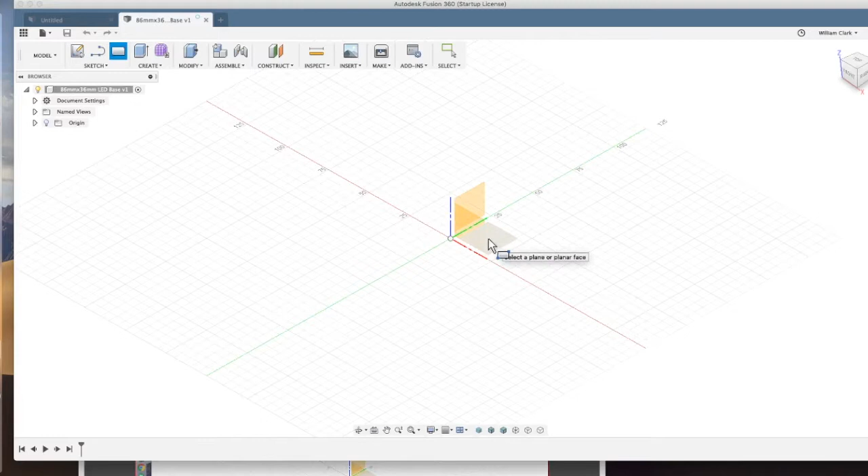Next thing we're going to do is we're going to create a 2-point rectangle. It's going to ask you to choose a face. I choose this one. That is the X, I guess. Now we're working on the X. It tells you to place the first corner. Click here. We're creating a 2-point rectangle. So click in the center, and that's it. Just click and drag. Click. Don't click again. Just drag out.

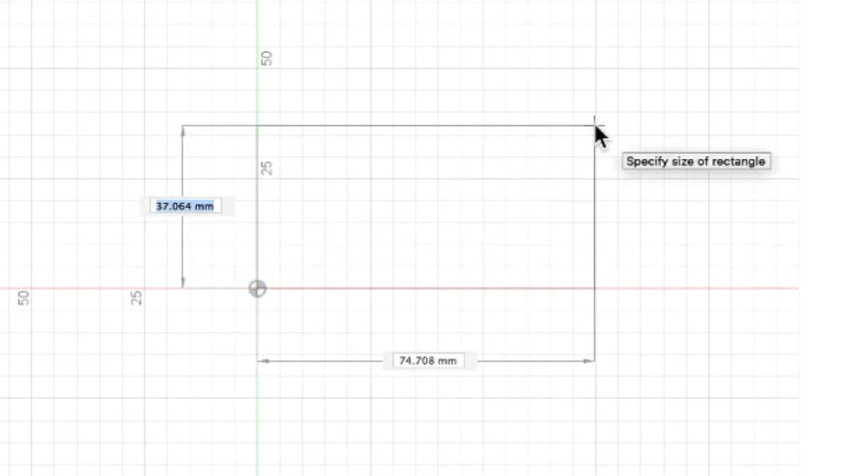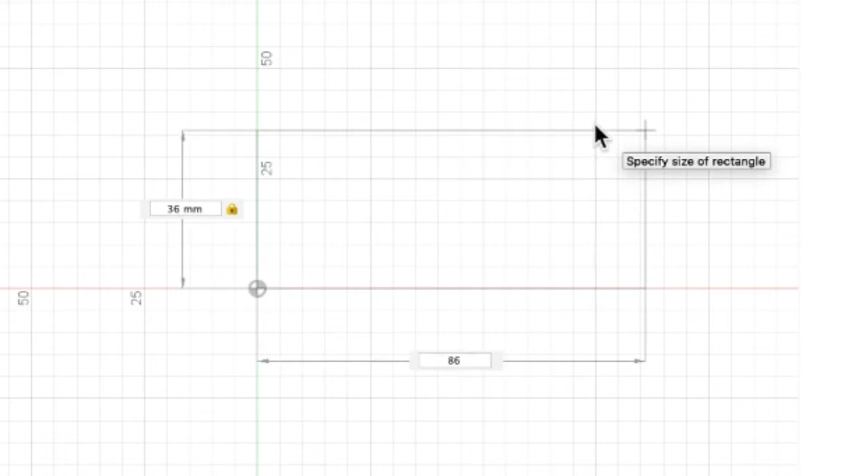And now you can see it's given us some dimensions already. Now you just type in what dimensions you want them to be. I wanted mine to be 36 mil high. There's 36 mil. Now hit tab. I'm going to jump over to the other one. Type in 86 because I wanted mine to be 36 mil by 86 mil. You type in whatever dimensions you want yours to be. Hit enter. Boom, there we are. We're locked in.

Now, you can move these around. This is just simply telling you how big it is. It doesn't change anything. But for housekeeping, you can move this anywhere you want to. Just click and drag it. And once this starts filling up with dimensions, you may find yourself wanting this dimension to be down here or to be closer or to be out or whatever. So you can click and drag these wherever you want them to be. This is just a signpost. This is just showing you what the dimensions of your work are.

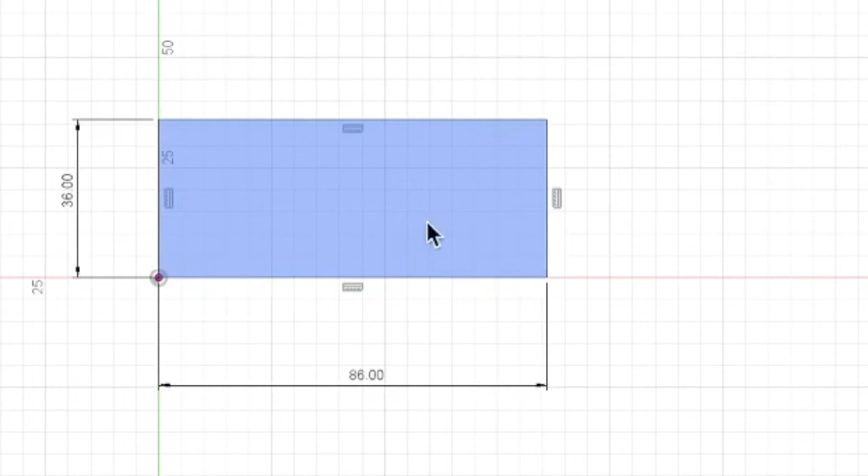Now let's talk about the dimensions of the work. These are things that when I first encountered Fusion 360 and CAD, I just didn't know. And so I'm going to tell you what I didn't know. I thought I had to put in this piece of wood here to be the exact size of the piece of wood I was going to be carving. No, Fusion 360 and this G-code that's going to come from all this doesn't care how big that scrap piece of wood you're putting in your machine is. All it wants to know is how big is the piece that you want after all the cutting is done and the sawdust has settled. So you put in the dimensions of the piece that you want. The final dimensions of this thing you're making, that's the dimensions that go in here.

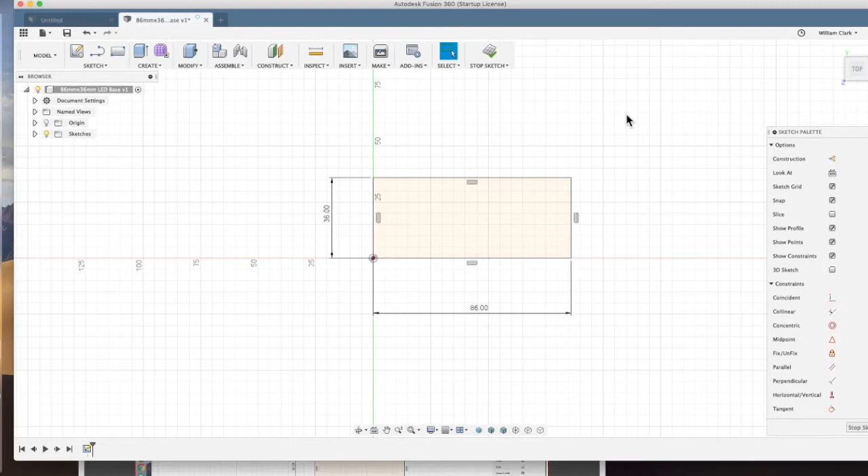We'll deal with how big the stock is, the wood you're cutting out of, or aluminum or plastic or whatever. We'll deal with how big it is later when we do setups. Right now, how big is your part? Put that in here. We're creating the part, the finished product. That's what we're creating. Now, if you remember, what we're making is one of these, an LED base. That's what we're making, but a lot smaller one. So now I've created the base here, except mine is 86 wide by 36 tall. This one's obviously bigger, but I've created that.

Well, now we have to create these other pockets. These carved out pieces, we have to create that on our sketch here to be able to tell the machine how to do it and what to do. Now we're not going to create one exactly like this. I'm going to put in a little trough here, a little slot for the LED strip, like this one. A little slot for the LED strip to sit in, and I'll create a slightly larger slot here on the end because we're going to make this one a little different from what these are. These are for NeoPixels, and I have an Arduino Nano that goes there, or Pro Mini goes there, and some other stuff. This is going to be a more simplified version.

But right now, we're going to put in this LED strip slot and then a slightly bigger slot here on the end, and we have to tell that. We have to tell Fusion 360 where we want that stuff to go. So at this point, we're going to draw some more rectangles.

You can sketch here, choose on sketch. This is called a sketch, by the way, what we're writing right now. See where it says stop sketch? Once we're done with this, we'll click stop sketch. We're in a sketch right now in our model area of Fusion 360, or mode of Fusion 360. We're in model mode, and we're working on a sketch.

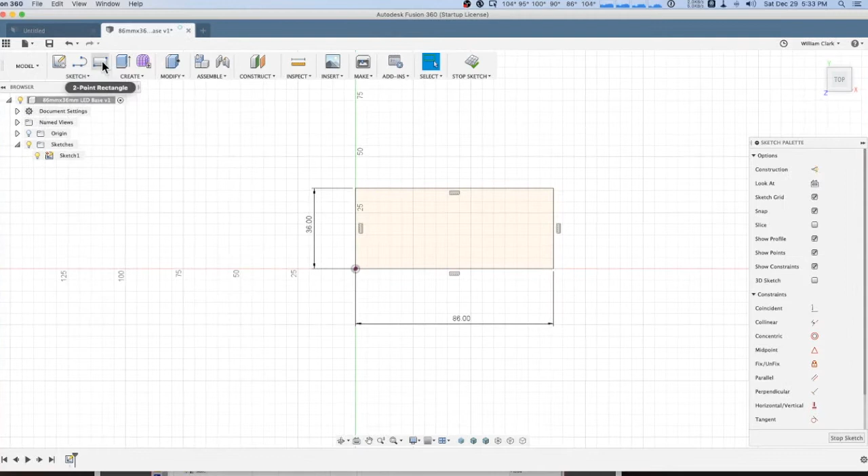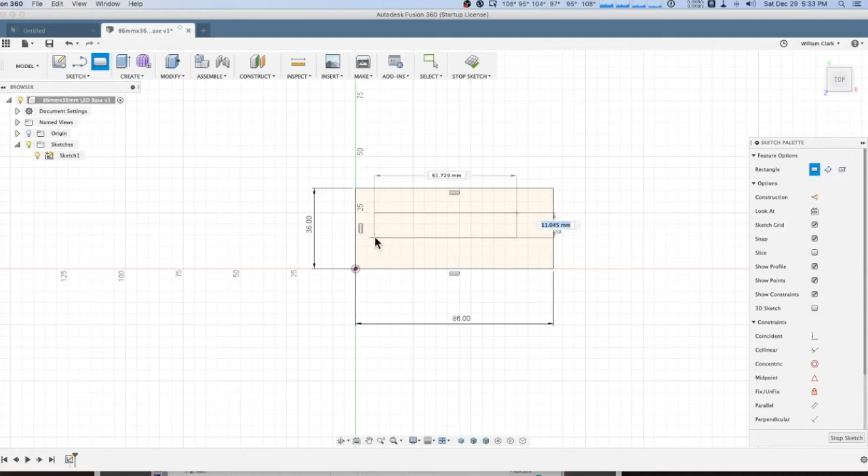The 2-point rectangle, to create this LED slot. And this LED slot, we're going to come from the side. And I'm going to eyeball it here. We are about 1, 2, 3, 4, 5, 6. So this is about center. So for now, we're going to start this slot here. And again, we're just going to click once, drag to whichever direction you want your slot to go in. And that's roughly how big I want it to be.

I think 10.3 is what these finally are. So there we are. I know from doing these other LED bases that 10.3 is how wide I want that slot to be, because that's how wide the LED strip is. And this is a total of 86 mil, and that's 60 mil. That's actually a good size. We're going to leave that 60 there, so we're going to hit enter. Now we've got a new rectangle in there, and we've got our sizes on it.

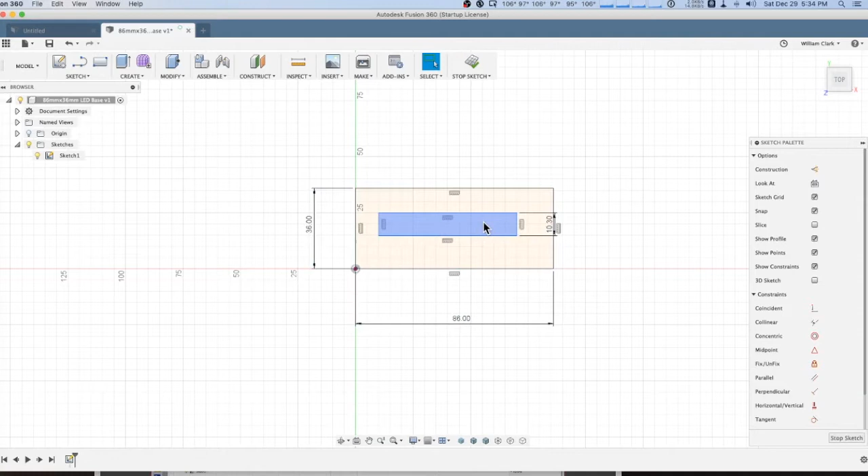It doesn't show the sizes or the dimensions here like it does there. And well, actually, no, it does here on the end. I wonder if that's because I didn't put in a custom size. Because see here, I can now double click this and change it. Change that to 7 mil if I want to.

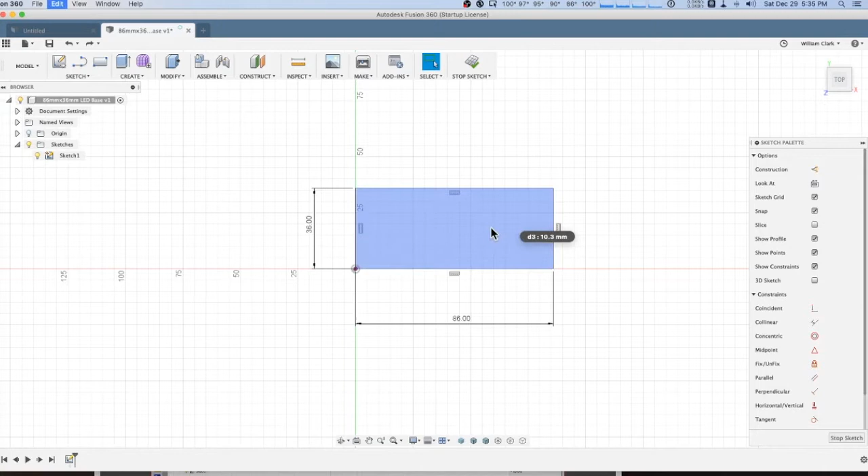Or you can do Command Z. I'm on a Mac. You can do Command Z and step back one, or probably Control Z on a Windows machine. But it didn't give me the dimension that I wish it had. I wish it had given me the dimension here for the 60 mil. I'm not sure why it didn't. I'm going to back up a step, and we're going to do that again just to see if I can get that dimension back, because that's nice to have both of those dimensions.

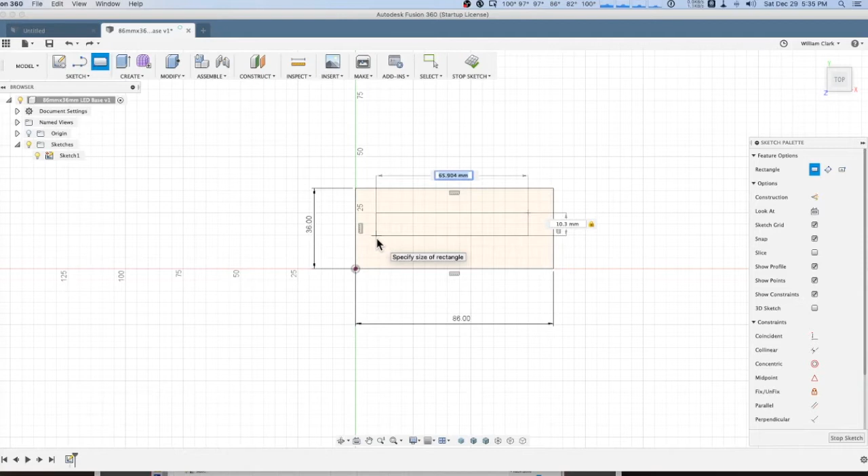I'm going to do a custom dimension. So I did a custom on this side here, and it left the dimension on the sketch for me. We're going to go up here and make this one 60, which is custom because that's not where it started at, and hit enter. And it gave it to me that time. So I guess when you just do the size that you drag, it doesn't give you the dimensions. I wonder why. Say if we just drag this new one, and I accept both of them. I don't do anything custom. It gave me the one dimension, but not the other one. Well, I don't know why it did that, but it did.

So there you go. So again, remember I told you you can drag these around. I'm gonna drag this down here, I like it in the middle so it can show me that this square, that's how big it is. And I'll do the same here. This rectangle, that's how big it is. And so I'm just getting things close here now. There are ways you can go in and center things up. I'm not that good with centering things.

I recommend you do get good with centering, because there's a whole philosophy and best practices that deals with constraints on these sketches. And I really need to get better at those constraints. I'm not very good at the constraints, and I'm sure that's going to bite me in the ass later on down the line. But for today, we're not going to worry about it. Today, this is just, hey, here's how to get a part out of Fusion 360 onto the machine and cut out and in your hands and boom, done. So I am going to center this part, but I'm going to do it the clumsy way. People that know how to center it, you're going to be screaming at your computers right now because of the way I'm doing it.

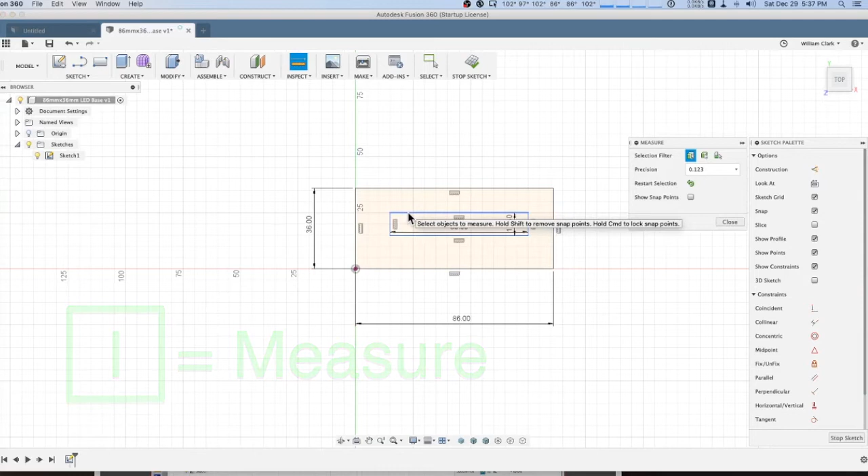I'm simply going to measure. I clicked I for measure and click what you want to measure from and to. And you can see that is 11 millimeters. I'm going to hit escape. Then I'm going to hit I again and click the bottom line of that rectangle and come down to the bottom and click. And it's going to tell me it's 14.7 millimeters.

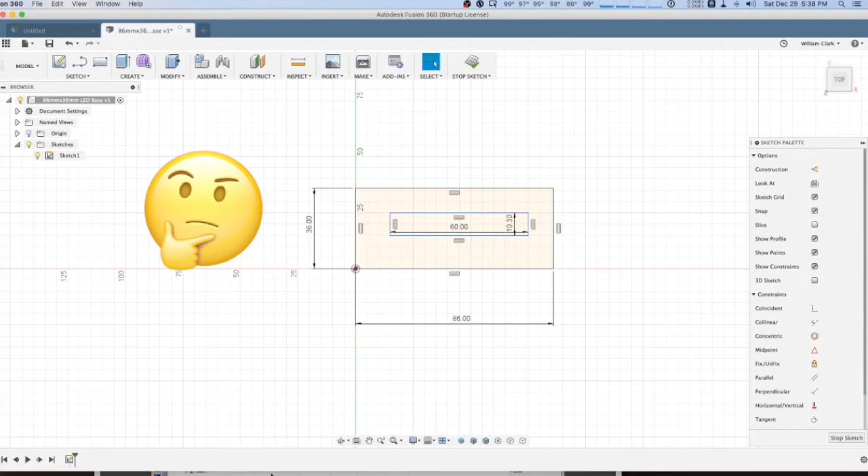So guess what I'm going to do? I'm going to cut that in half, and I'm going to use that as my center. So 14.7 and 11 at the top. So that leaves me 3.7 that I need to trade off to center this thing. So if I cut that in half, that's 1.85. So if I make the top 12.85, 11 plus 1.85 is 12.85.

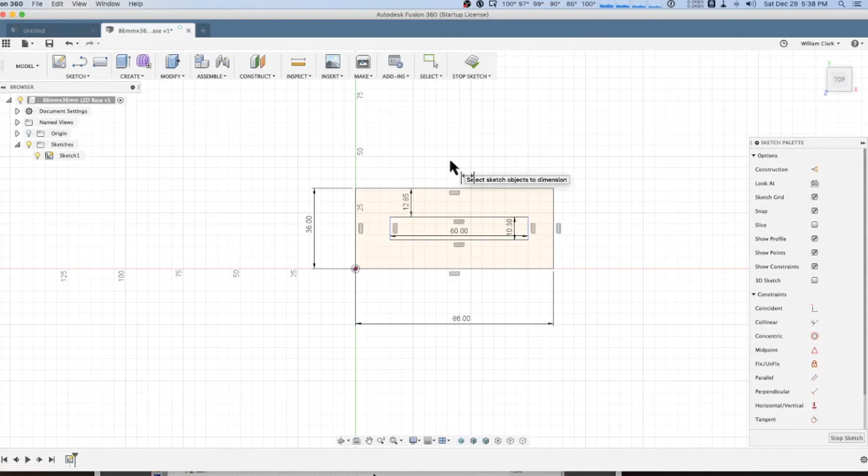I'm going to click D for dimension. Click this top line here and click this. And I'm going to drag this way out here. And it's 11 now, and I'm going to put in 12.85 and hit enter. And this line is now 12.85 millimeters from this line. I'm going to drag that back over here just so it'll be there and it'll show us that. I'm going to click escape to get out of the dimension mode. Otherwise we'll create more dimensions, which we're going to do anyway.

So that's how I centered it up. There are other better ways to center it, but this is the way I do it. This could be one of those cases of do as I say, not as I do. So learn about centering your dimensions, learn about constraints. You'll be better off in the long run for it. It's on my list of things to do. I just haven't done it yet. I'm kind of doing it the old, clumsy way.

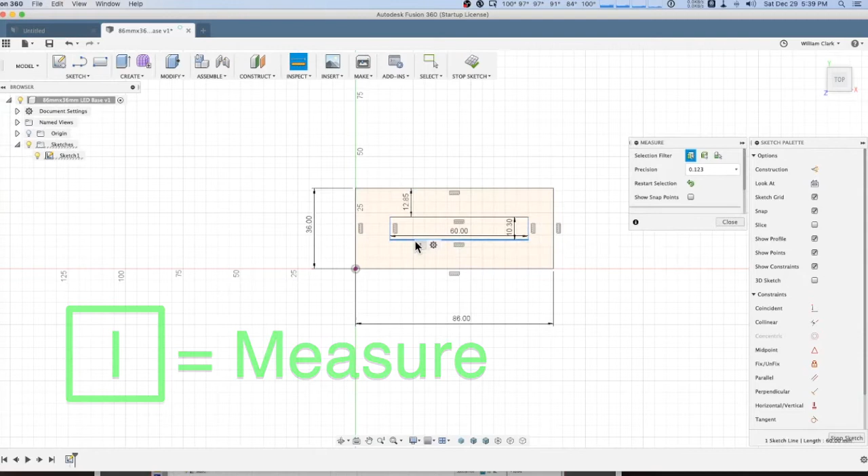So that is now centered. That's 12.85 from that line to that line. And to double check it, click I for measure and click the bottom of this rectangle to this, and it should be 12.85 because math. All right, so I hit escape again. Now we're centered that way. I'm going to go ahead and center it left to right too, because normally I wouldn't if I was actually making this to be a real base. I would offset it, but I'm not making this a real base. This is just a test piece for you guys.

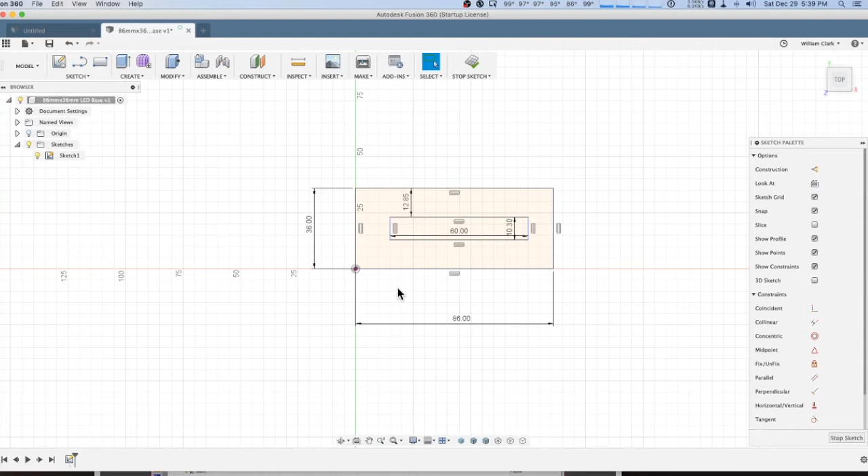So I'm going to zoom in a little bit by using my scroll wheel. We're going to scroll back, which will zoom us in a little bit. And we're going to click hand down here, which gives me the hand. Now we got a little higher resolution here. I'm going to do the same thing I did a minute ago. I'm going to click I for measure. We're going to measure the distance from this side of the rectangle to this edge of the thing. That's 11 mil.

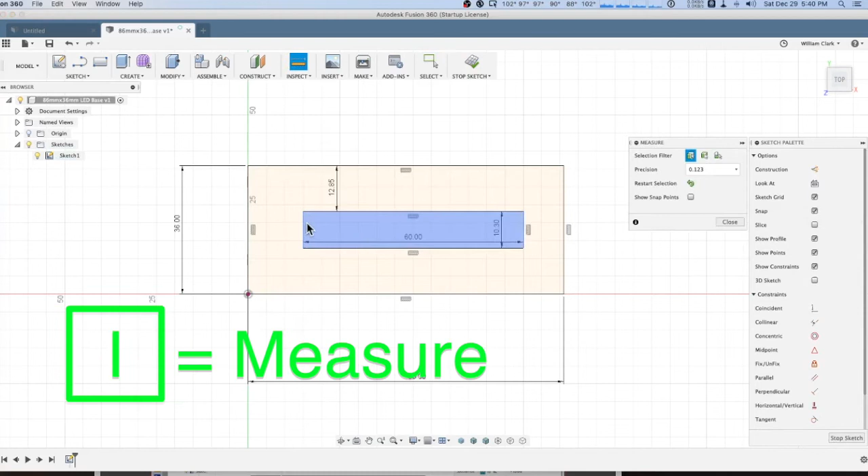I hit escape, then hit I again. We'll go from this side of the rectangle to the far side, and that is 15. So we're a distance of 4. Well, that's easy. We're going to do half of that, which is 2. So we're simply going to add 2 to this side over here. But I'm going to put the dimension on this side because we're going to put some stuff in here. So 11 plus 2 is 13.

So we want this dimension, click D for dimension, to be 13 millimeters. Click here, and then you want the dimension to run to here. Now drag down here and click once. And it's at 15 now, but I want that to be 13 millimeters. Click escape to get out of dimension mode. Now this side is at 13 millimeters. I'm going to pull that up there just so it's right there. And again, to double check yourself, click I, go from this side of the rectangle to the outside, and that is also 13 millimeters. Click escape to get out of measure mode.

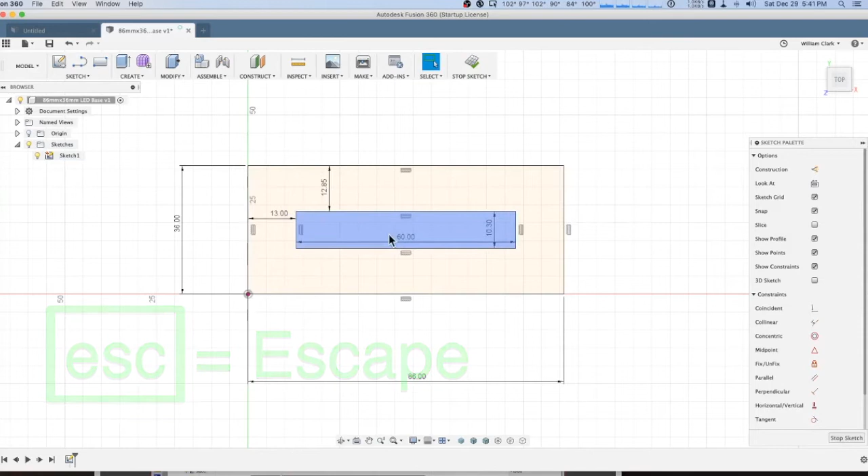And so now we've centered our rectangle here in the middle for where our LED strip is going to be. We're 12.85 mil from the top, 13 mil from the left. And those dimensions are equal on each side, top and bottom. So now we're centered. So now I'm going to put in another little pocket for the controller that controls the LED strips. We're going to create another 2-point rectangle. I'm going to create this one just for the hell of it. I'm going to create it up here.

Right about there. I'm going to drag it over, and it's going to be about like that. That'll work. Yes, we're going to make this 6 mil by 12 mil. Hit enter. Now there's our rectangle. But we don't want it up there. We want it down here.

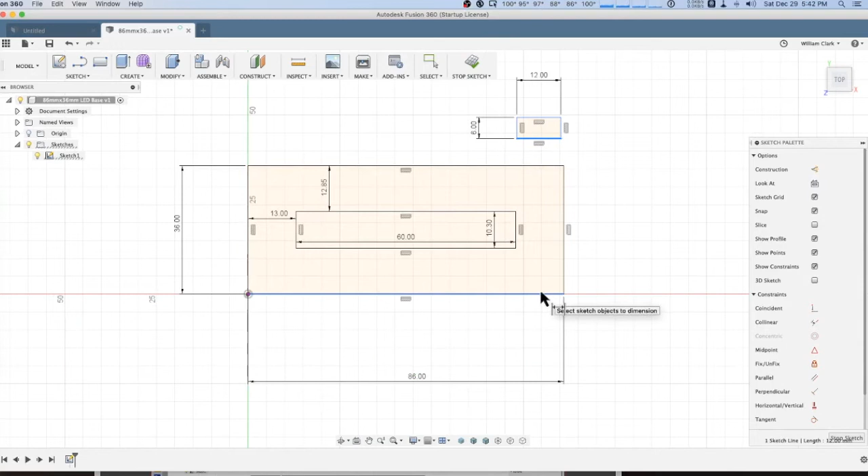Well, what I'm going to do is we're going to dimension it to put it down there where we want it. I'm just going to go ahead and do that right now. I'm going to hit D. We're going to dimension this from here down to the bottom. How far is that now? It's 43 millimeters now. Well, we want it to be a lot closer to that, so we're going to go 30 millimeters. That brought us down quite a bit, but not far enough.

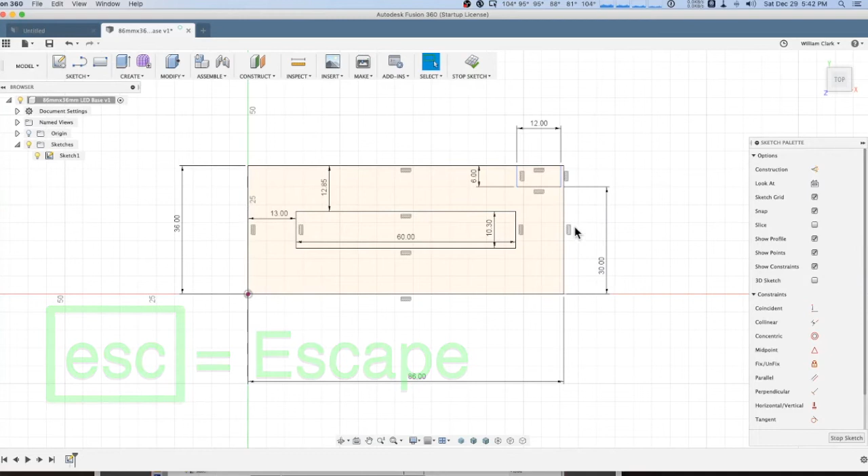So I did that in this way to show you that I'm going to escape out of the dimension mode. Now, this is a dimension, right? This edge here is 30 millimeters from this bottom edge. You want to change that, just double-click the number. Now you've changed it. So now we're going to drop that to 20. We've gotten closer. So now we're going to double-click that again and make that 16. Ooh, we're real close now. We're almost dadgum centered there now.

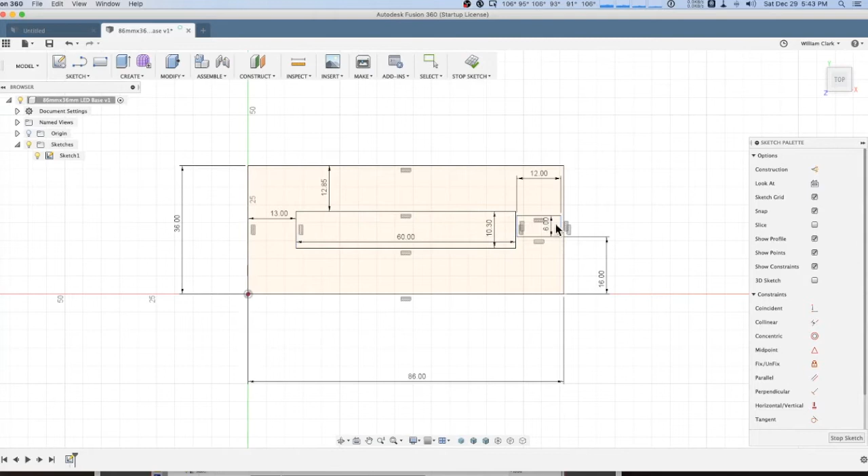Now we know that this is 36 millimeters. And this is, what, 6 millimeters? Yeah. I'm going to drag that dimension over here. Drag this one down here. So this is 6 millimeters, and the whole thing is 36 millimeters, so it should be 30 on the outside, so that's 15 on each side. So we're at 16, so boom, math. There, we're centered.

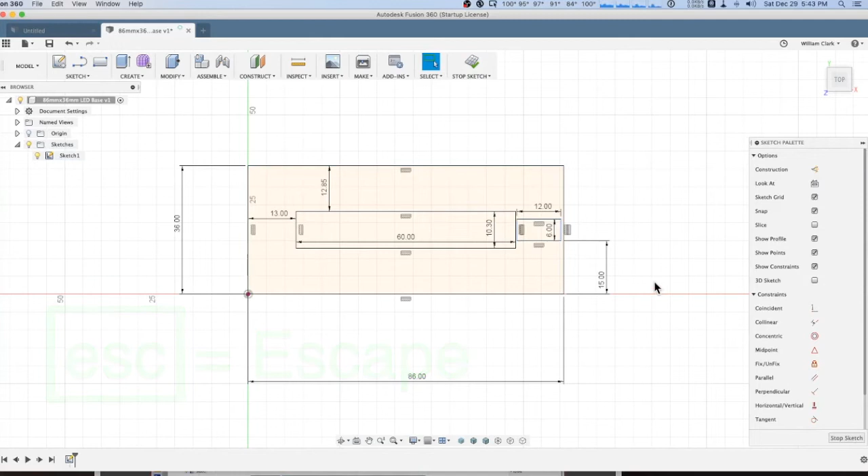15 from here to here, and we're going to click I to measure, top line to this line, boom, 15 millimeters up there. Hit escape to get out of measure mode. So now we're centered there. I'm going to zoom in again because we got some slop here, and I'm going to want to change that.

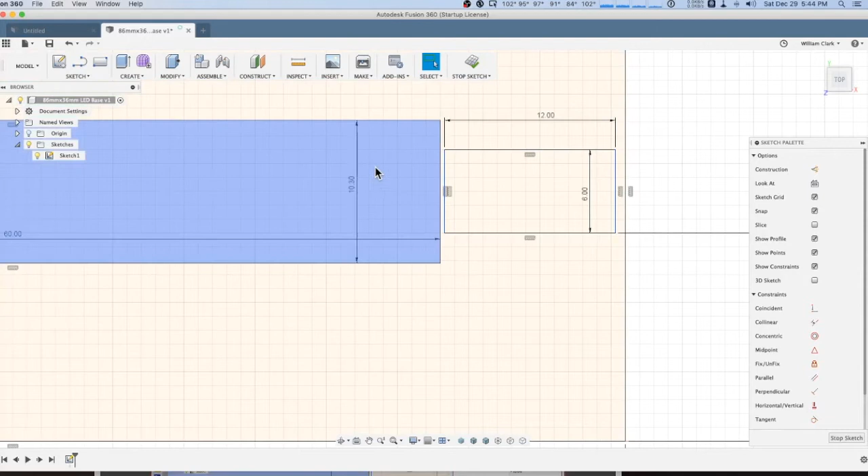See how this line for this little pocket we put in doesn't quite meet this pocket? That means there's going to be some material there whenever we extrude this. See, this is all going to be a different height. This is going to be the full thickness of our wood. And these two aren't, because we're going to go in and pocket those out.

So right now, if I extrude this part, this is going to put up a little channel of wood in between there on the left side and over here too. So I want to make this a little wider to go in and cover up that spot and to cover up this outside edge to make a channel all the way to the outside of the part.

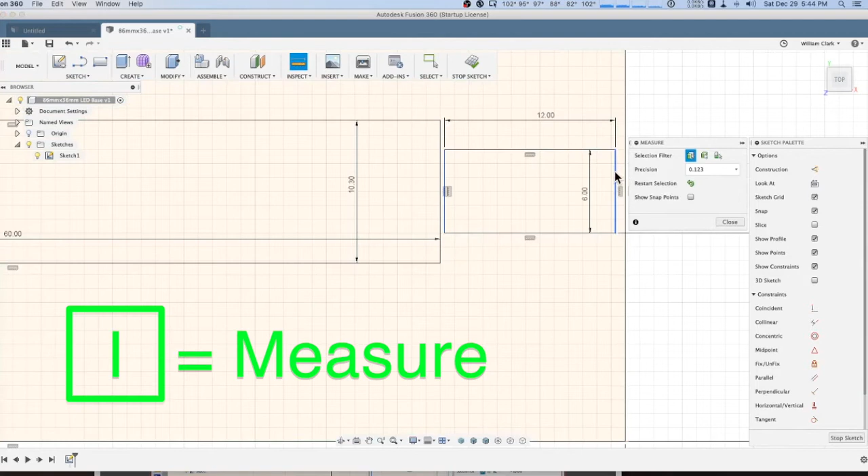I could measure, and I will, just for the hell of it. From here to here is 0.7 mil, escape. So that's 0.7 mil, a whole lot less. So I could probably add just 1 mil to this, 13, and that'll cover both of them. It did, but it only went in one direction. It went to the outside. We want to move that to the inside to cover up this gap here too.

And the way we'll do that is 15 by 6. Here we are, 15 down here. But we haven't dimensioned left-right yet, have we? No, we have not. So I'm working from absolutes here. But what I can do is click. I actually forgot something, which would have made our life a little easier here. I can dimension, right now, from this line to this line.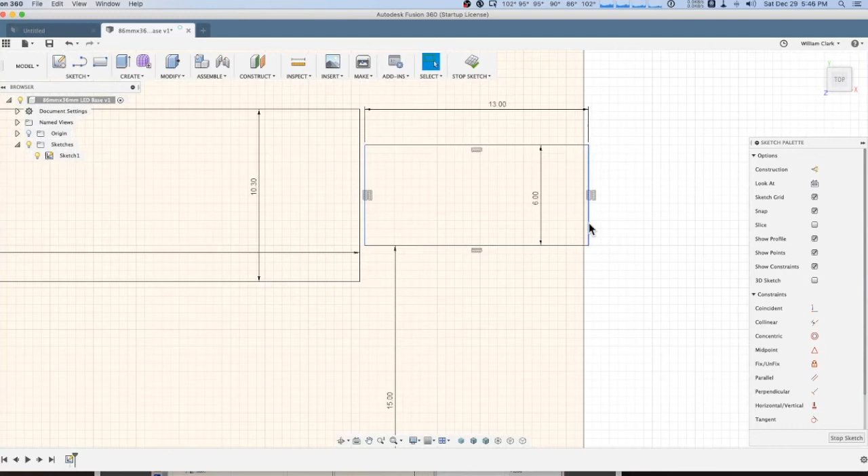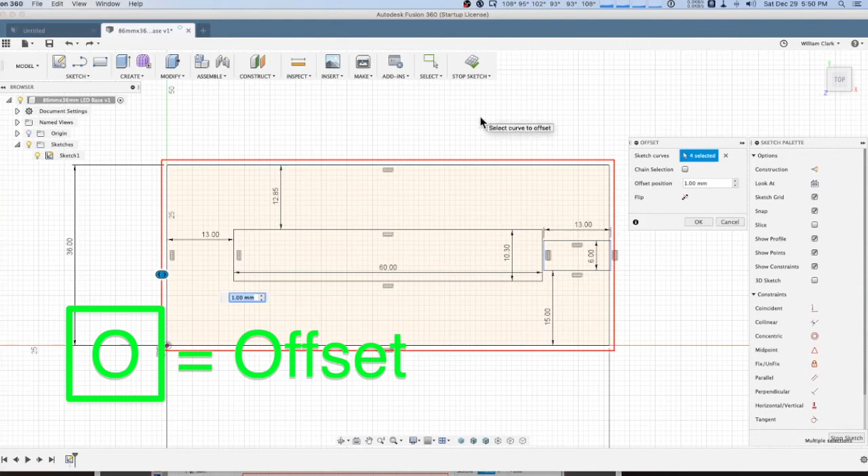But there's a cleaner way to do it. And I'm going to see if I can remember to do it, because I haven't done it this way in a while. Now we're going to hold command and choose our lines. And then we're going to click O for offset. And we want that offset to be a 4 millimeter offset. And then we're going to click flip, and that moves it to the inside. Aha! And we're going to click OK.

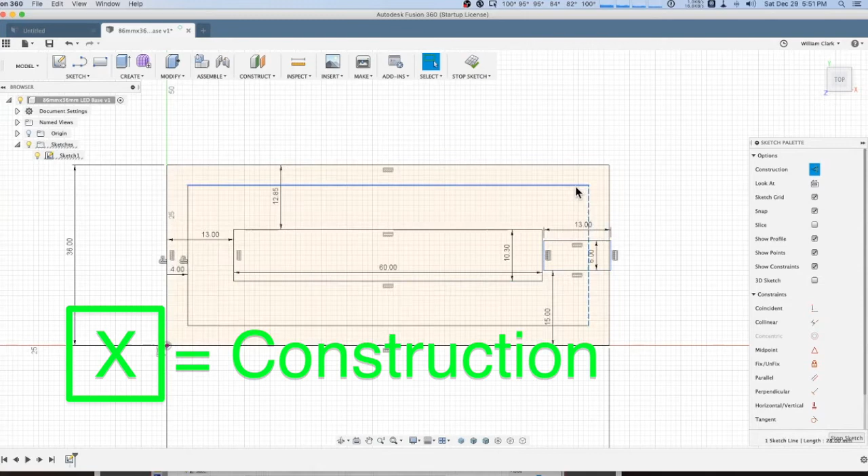Now the reason we did that is we don't want that to be a separate part. We're going to make these inside 4 millimeter offset lines construction lines. So you choose the line and click X on your keyboard. Choose the next line and click X, and you can see they changed to dotted lines.

I'm choosing each one, and I'm hitting X on the keyboard. Now, those are construction lines, meaning they have no bearing over the final part. They're just there for reference, for my reference. The reason I did that is because now I want to set a dimension here, and I didn't want to dimension this from this because that's going to be so close. I can now dimension this from this construction line, which makes it a little bit easier.

So I'm going to do a dimension, and we're going to dimension this outside of the rectangle to this construction line. Bring it down here, and that's 4.29. We're going to make that an even 4 and see what happens. Hit escape. And now look at that.

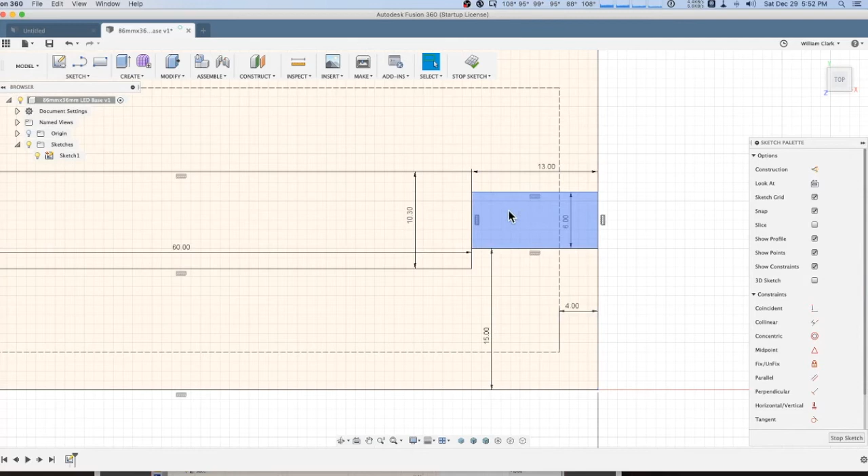Our outer part, our part on the outside, the rest of the base is now one solid piece. Our slot here for the LED strips is one solid piece. And our pathway, our smaller little slot to the outside, is one smaller piece. Well, how about that? Construction lines. Use them. They come in very handy. Just draw regular lines and then just click it and hit X, and that changes it to a construction line.

So we've got everything constrained here. We are now ready to extrude, which means we're ready to bring this part from the 2D world, flat on a piece of paper or on a plane, into the 3D world. Because right now it's not in the 3D world. We want to know how thick this is because that's how thick we're going to tell it our stuff is in Fusion 360, because that's what we're going to cut in the real world. So we're going to measure our thickness.

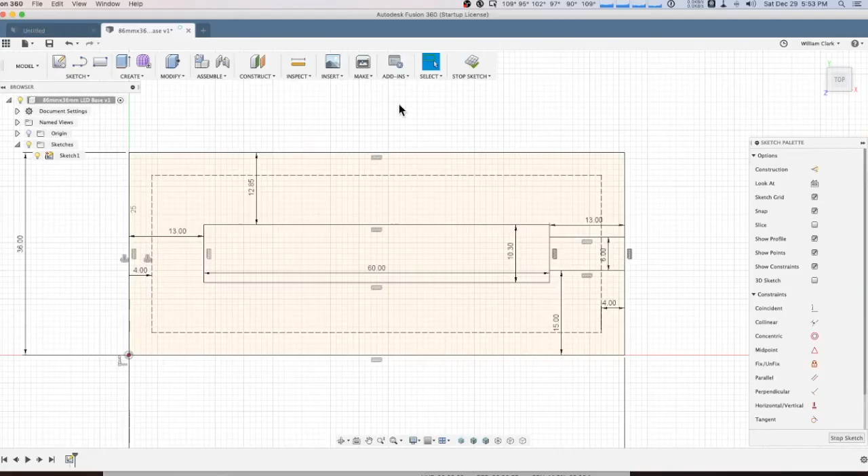And this one is 12.37. We're going to call that 12.4, because I've learned to fudge a little bit. 12.4 millimeters is our thickness of the piece we're going to be cutting. 12.4 millimeters is how thick this piece of Baltic birch plywood is. So that's how far we're going to extrude it.

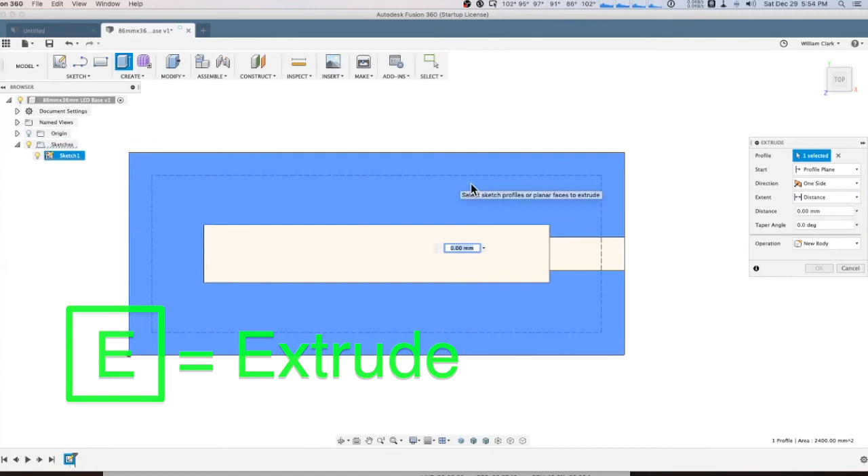You choose the piece you want to extrude, and in this case, this is the part of the wood that isn't going to have any cuts made to it. It's going to remain its thickness here. We're going to click on it, hit E for extrude, and you can see we changed to the extrude window here. And by default, it's at 0. We're going to type in our thickness, 12.4 millimeters. Hit enter. And there's our piece.

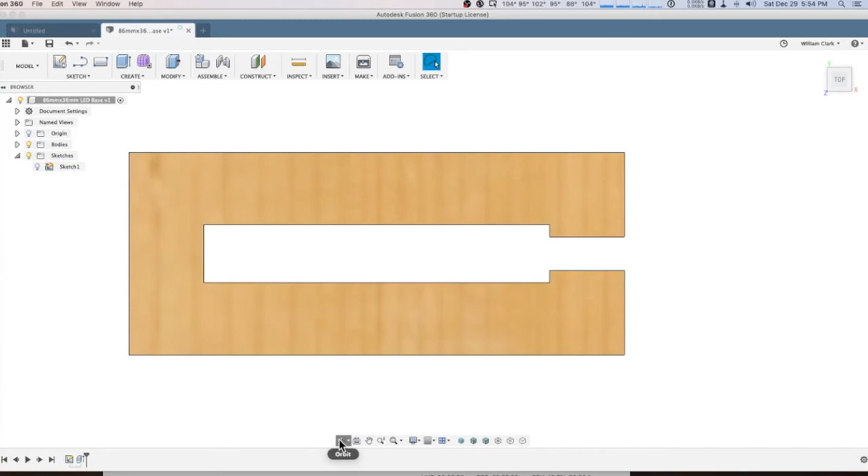Come down here and click orbit. Turn it on its side and look. We've gone from the flat 2D dimensions into 3 dimensions just by extruding this guy by 12.4 millimeters. How cool is that?

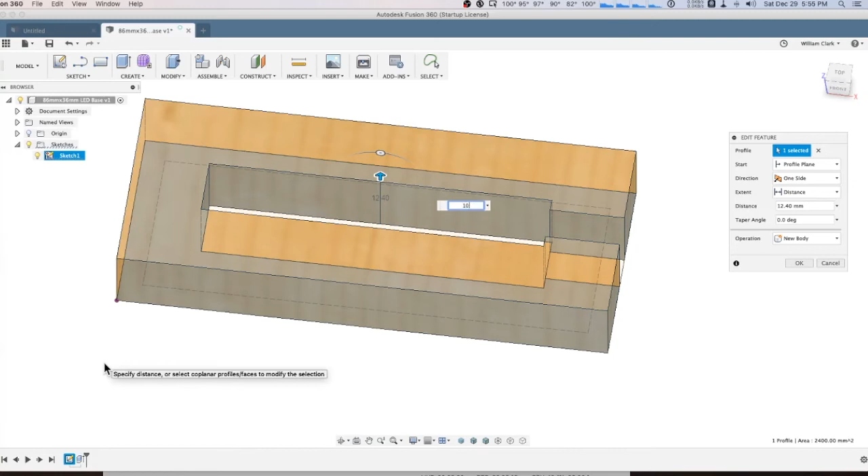If you want to edit that, come down here. This is your extrude operation that we did down here in our timeline. Simply right click and choose edit feature. And you'll get your 12.4 dimension up there again. Did you screw it up and it only needed to be 10 millimeters? Okay. Type in 10, hit enter, and you can see it shrunk down. Now it's only 10 millimeters.

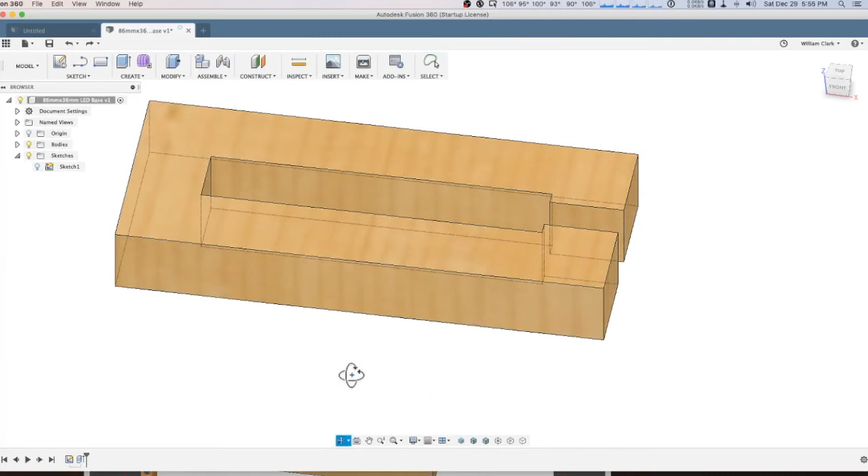All right. We're going to hit Command Z and go back to 12.4 millimeters because that's how thick our wood actually is. Now then, we're not finished. Hold on. What about these pieces in the middle? If we don't do anything now, we're going to have to cut this all out, and there's going to be just empty space because it's going to be a big hole.

So what we're going to do is turn the sketch back on because by default it turns it off. Just hit the little light bulb. That turns it back on, and now there are our other planes there. Our LED strip will go there, and our control circuitry will go there and have a clear path to the outside of the part where we can plug in power from the outside.

So we need to extrude these two pieces too, but we don't need to extrude them up to 12.4 because if we do, we're not cutting anything out. They're going to be the same thickness as our wood. We have to determine how deep we want that to be.

We're modeling it based on this LED base that I've already done here. So we have a thickness here. I know what the thickness is, but if you're not sure, I have one already, so we're just going to measure that. I think it's around 2.8 mil. We're going to measure that thickness or that depth.

And it is, in fact, 2.8 mil. So this is 2.8 mil down from the top of the wood that we're going to go and cut out. So we want this to be 2.8 mil lower than the top of this 12.4 mil, right? We want to cut out a 2.8 mil trough or strip here in the middle for our LED strip to fit down in. We want it to fit flush.

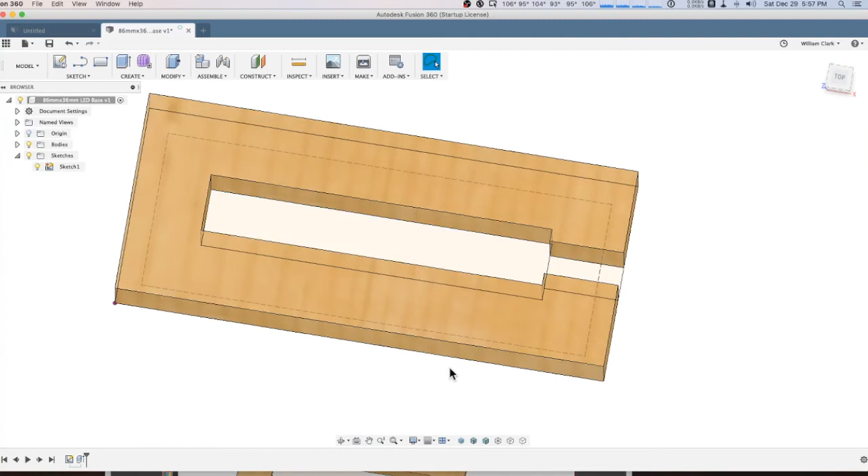So you simply say 12.4 mil, which is the thickness of your wood, minus however deep you want this first pocket to be, and that's how far we'll extrude this up. Because we're extruding it up from 0. We're raising it up from 0. So 12.4 minus 2.8. Well, 12.4 minus 2.4 leaves you 10, and we're going 0.4 more, so 9.6.

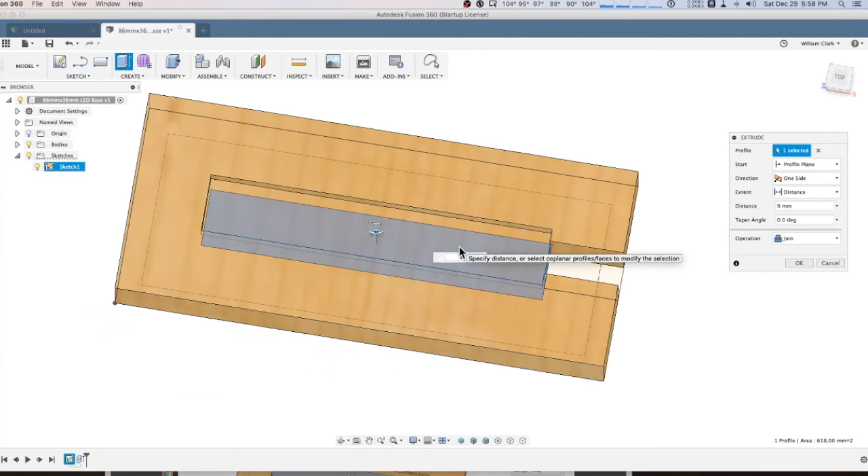So we'll hit E for extrude, click on this, and there's our dimensions. We type in 9.6, hit enter, and now that has risen up by 9.6. And you can see it hasn't risen all the way. It's stopped approximately 2.8 millimeters from the top of our wood. So there's our LED strip slot right there.

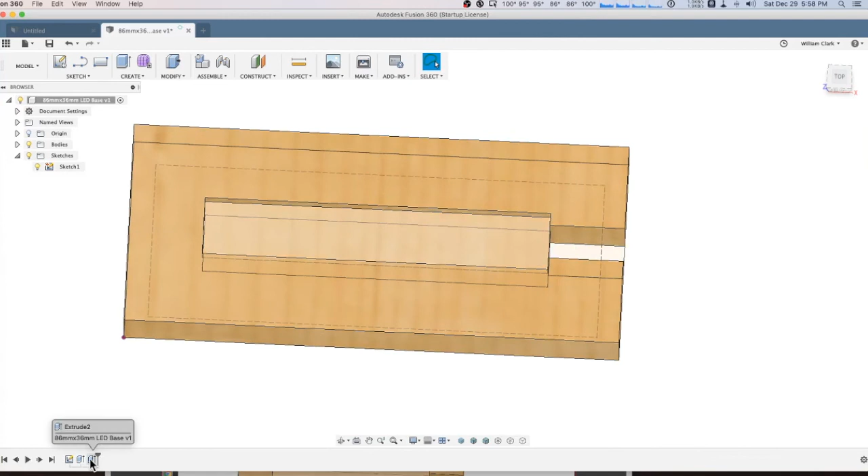We're going to continue on because we have one more slot to do. This is for the control circuitry. I happen to want this to be the exact same height, but it doesn't have to be. I'm going to make it the same height though, but it's obviously a different width here. So I'm going to make this, what was it, 9.6 also? Have you forgotten? I forgot. Let's go back, right click, edit feature. Ah, 9.6. That's where it was.

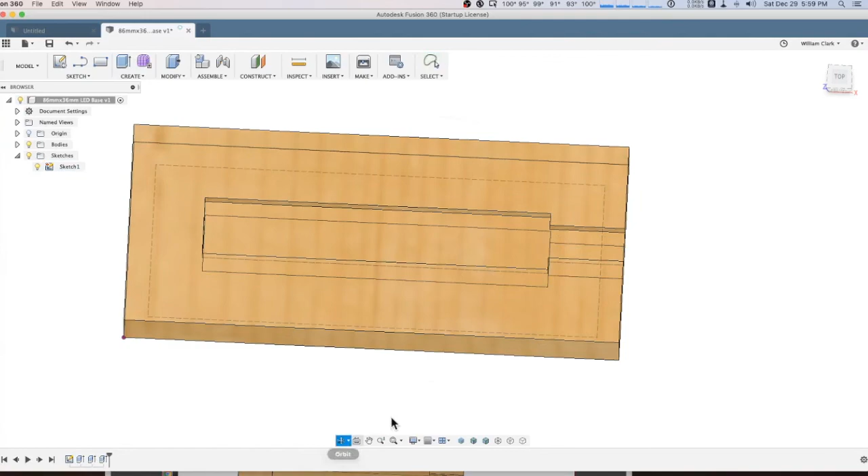Hit escape. Now, click E for extrude. Click the part we want to extrude. Enter 9.6 to make it the same depth as the LED strip slot. Hit enter. Boom. Now they're both at 9.6. And you can see it actually joined them. Made them one solid slot on the top.

You still have the dividing lines on the bottom where the sketch is, but up here in the real world, they're the same height, so they're the same plane. They're going to be the same depth right there. So that's it. That's what we want to cut out from there. The only thing we have left to cut out here to keep this rather simple is we want to put some nice rounded curves on it.

As you see on these, we've got nice rounded radiuses here. Got radiuses on the corners. Why do a pointed square piece of wood when you can do something smooth and cool like that? So I know from experience that is a 10 millimeter radius, and so that's what we're going to put on our base here. We're going to put a 10 mil radius on our base. And to do that, it's rather easy.

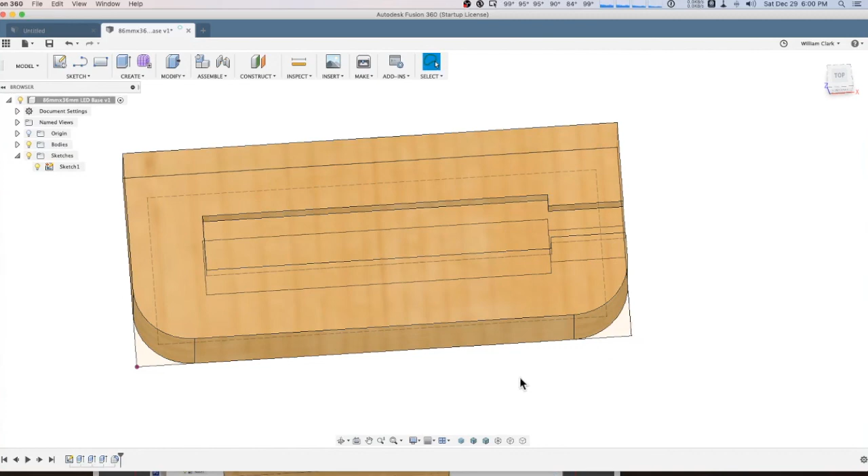You click F for fillet. Click the first edge, the vertical edge you want. And that immediately asks how big do you want it to be. You can click more than one, so I click as many as I can see, which is normally 2. Now they're both there, and just enter 10, and enter, and they've both changed to a 10 millimeter fillet.

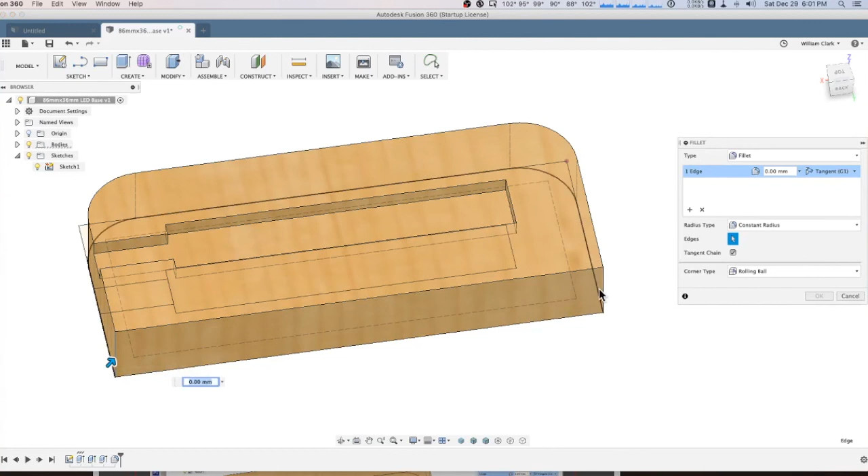Rotate them around, and we're going to do these other 2 on this side. Click F for fillet. Oh, click escape. Because when that window pops up, it's going to cover up what I'm doing. There we go. F for fillet. Click that vertical edge and that vertical edge. Type in 10. There's your 10 millimeter fillet.

Spin it back around. Go to the home position. There's your hero shot. Ta-da! Hide the sketch. There's your part. Ready to go. Next part is CAM.